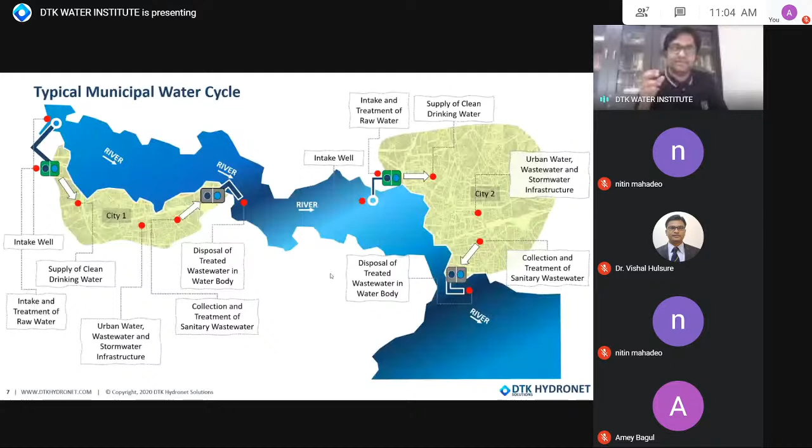Today we are going to see how a typical sewerage scheme looks like. Now, once we supply water, it's also the utility's responsibility to collect this consumed water in the form of wastewater. We collect this water and we treat this water, and we have to reuse it or dispose it back in the source.

So we have different combinations of hydraulic calculations which can be considered while analyzing and modeling a sanitary sewer network. For instance, in this particular case, we have pressurized hydraulics as well as open channel hydraulics. Right? So all this wastewater is collected by virtue of the potential energy that is available in the water, and that also means that we are collecting it under gravity.

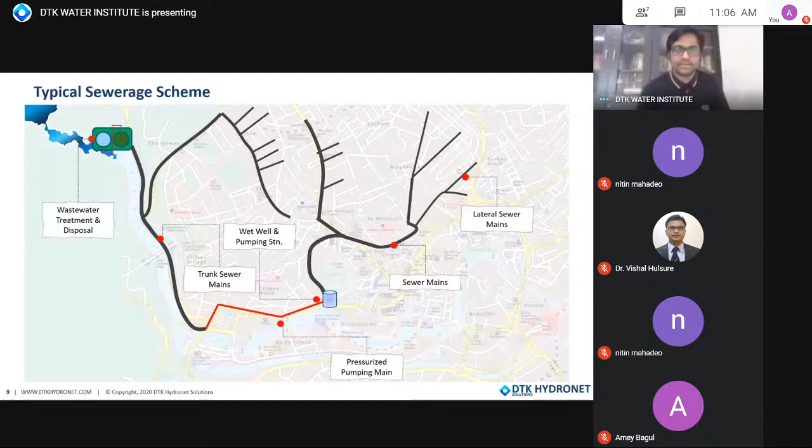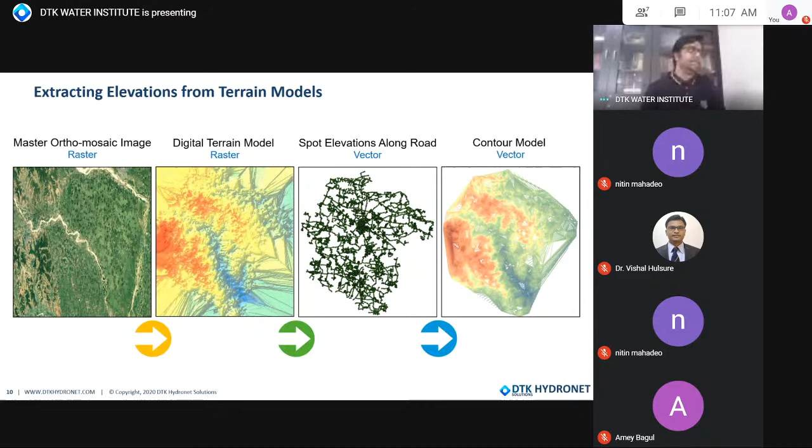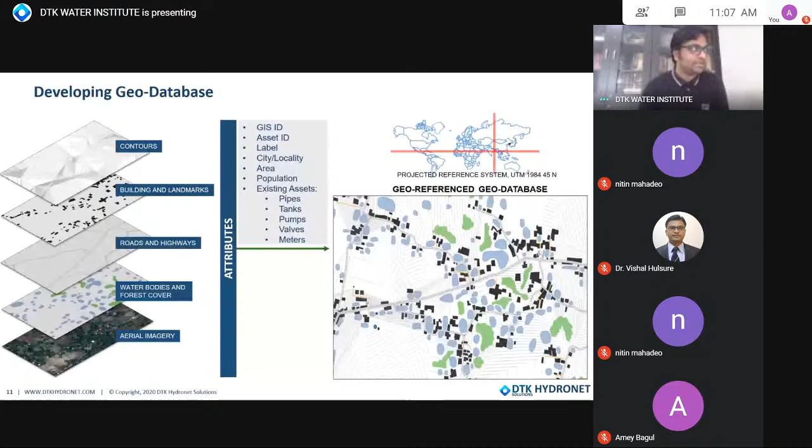And once all this data is developed, then comes the process of hydraulic modeling. Now, yesterday we saw what a hydraulic model is. Again, I would like to repeat. A hydraulic model is a mathematical representation of your real sewerage or water supply infrastructure. This representation consumes different types of equations, and calculations are modeled so that it gives you hydraulic information as a result.

Now, what kind of hydraulic information would a sanitary sewer network give us? It gives me the depth of water. For conduits, it gives me the velocity of wastewater flowing through those conduits, right? Is it maintaining the self-cleansing velocity criteria that the CPHEO mentions, or is it violating the maximum scouring velocity? Is it going beyond that?

So we can have an understanding of velocity, of discharges, and also of this d/D, that is the depth of water inside the conduit divided by the diameter of that conduit. So we can have these different properties as part of the results generated once the hydraulic model is computed. Also, for manholes, we can understand which manhole is contributing how much sanitary wastewater load on the system.

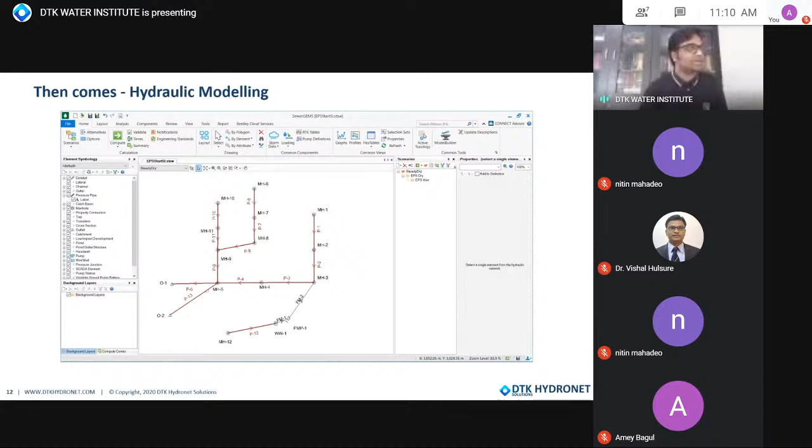With this data, we construct a hydraulic model, and we enter all the physical properties of the elements of the hydraulic model. For example, if I have an existing sanitary pump station in the network, what are the pump characteristic curves, right? If that is an existing pump, I'll have to gather all that data and enter the physical properties of the pump in the hydraulic model.

Then we start allocating the sanitary loads to every manhole. In India, most utilities calculate this using some kind of Excel, or you can also use GIS maps and polygons to understand the contributing population on every manhole, right? Once we understand the contributing population on every manhole, we understand what the sanitary load on those manholes would be. Then we compute or design the hydraulic model.

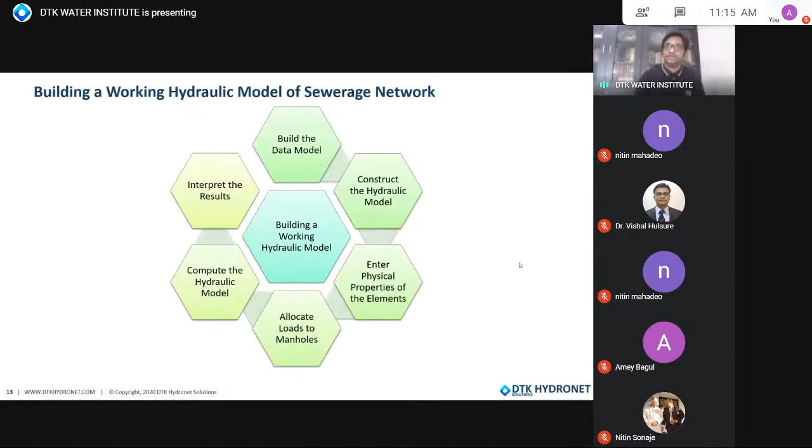It can also handle pressurized as well as gravity systems, like I showed in the first couple of slides, where you collect water under gravity up to a certain point in the network, and then you pump the water either directly to the STP or to some high elevation from where water would flow under gravity. And you can use SewerCAD to automate the design of pipelines and inlets. It will also help you understand what should be the manhole invert levels, the optimum invert levels of every manhole.

And whether it's possible for us to practically have those invert levels in the network, because it depends on many other factors. For example, it depends on the kind of substrata that we have, the type of rocks beneath the ground. So it depends on multiple factors, but it gives me an idea whether I should go for that particular invert level or some other invert level. So this primary design can be obtained with the use of SewerCAD.

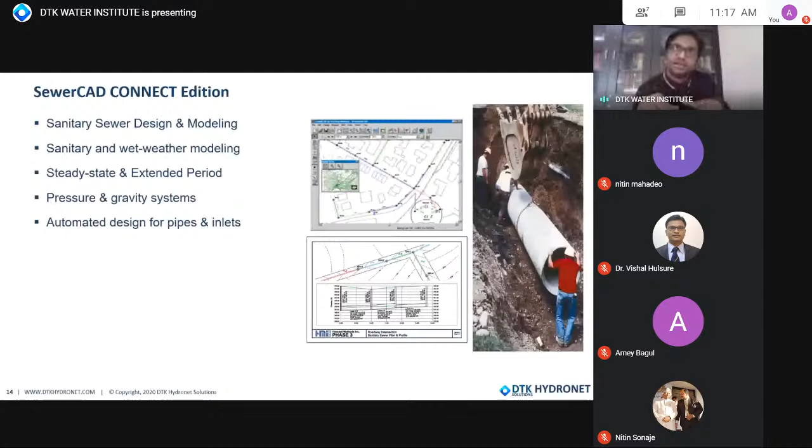The next software is StormCAD. StormCAD is a software for storm sewer modeling and design. When I say storm sewer, all the stormwater infrastructure that you have in the city, you can model, analyze, and design using this particular software. Now, mind you, sanitary sewer hydraulics is different from storm sewer hydraulics. The fundamental difference is that in a sanitary sewer, the loads are contributed by the human population.

However, for storm infrastructure, the water load on the system is being calculated by the rainfall events, right? And it also depends on what kind of return period you are dealing with. So this uses the popular equation, the rational formula, to analyze and understand the discharges through pipes, and it can be used as standalone, and it can also be integrated entirely with AutoCAD, and it offers quick model building tools. It is easy to use, layout, and so on and so forth.

However, this tool can also be used for automated design of storm sewer networks, right? So this is another tool that I want to introduce. The third tool is CivilStorm. Now, CivilStorm uses dynamic wave modeling, dynamic wave routing, and it offers fully dynamic stormwater analysis and optimization. Now, when I say dynamic wave routing, most of you might know this popular equation, St. Venant's equation. It uses St. Venant's equation for dynamic wave modeling.

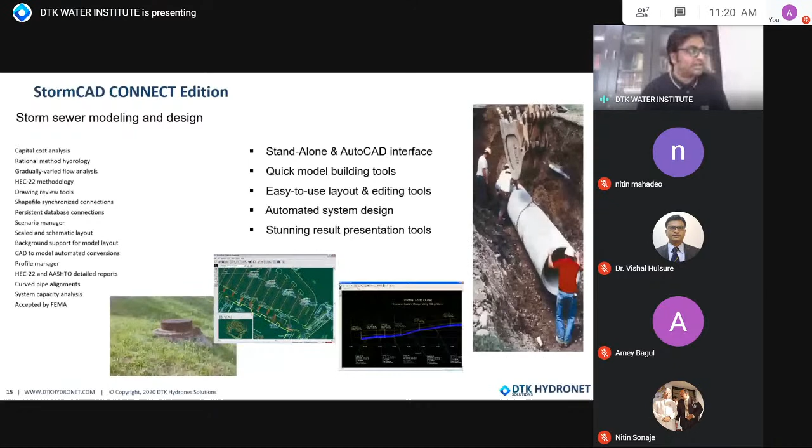And you have to understand, if it rains heavily in Parel, how is that affecting Worli, in another part of the network, because this goes across up to Worli. This is an example, right? So you can use CivilStorm to understand the dynamic behavior of rainfall and its impact on the stormwater infrastructure. Now, these are three different software using different equations, having different hydraulic mechanisms working behind them. When I combine all these three software, that is StormCAD, SewerCAD, and CivilStorm, and bundle them in one software, that software is called SewerGEMS.

Now, as I told you yesterday, GEMS stands for Geospatial Environmental Modeling Software. So this offers complete integration with the GIS application, which is ArcGIS. At the same time, it offers complete integration with AutoCAD and MicroStation. So CAD as well as GIS applications, right? So when I say that it offers complete integration with GIS, I intend to say that if I open ArcGIS, I can use all the features and functionalities of ArcGIS, and on top of it, I can integrate ArcGIS with SewerGEMS.

So with all the features and functionalities of ArcGIS, I can use all the features and functionalities of SewerGEMS, all these three software, right within ArcGIS. So everything will look like ArcGIS, but you'll have an add-on feature of SewerGEMS functionalities right within ArcGIS. The same is true for AutoCAD. SewerGEMS also completely integrates with AutoCAD, so all the features that you'd be looking at would be available right inside AutoCAD.

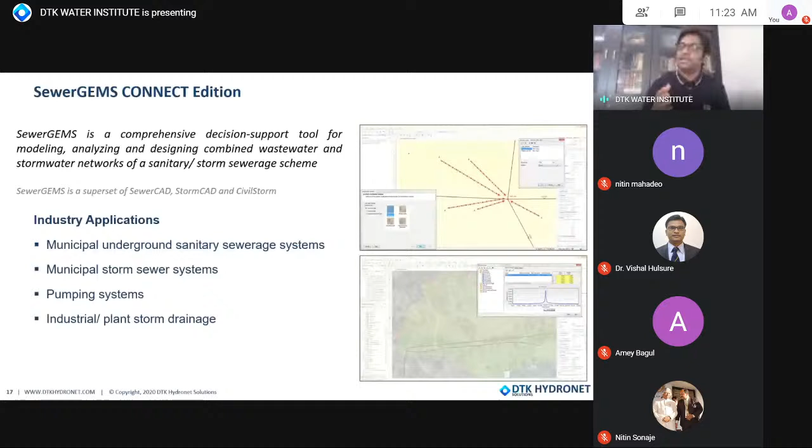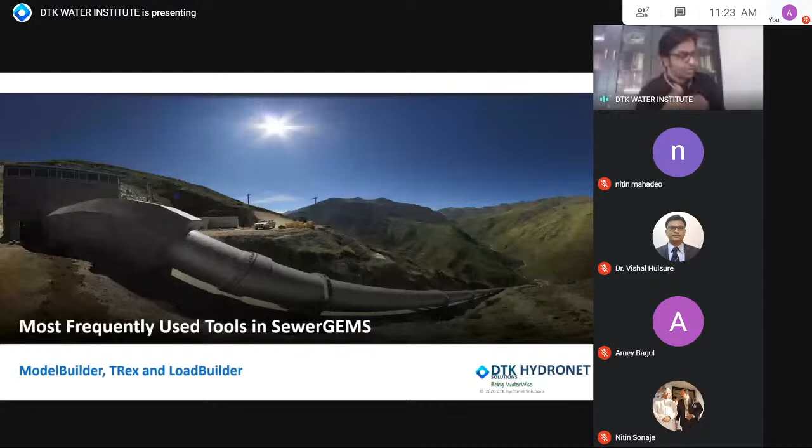So SewerGEMS is a comprehensive decision support tool for modeling, analyzing, and designing combined wastewater as well as stormwater networks of a sanitary or storm sewerage scheme. Now let us take a look at the most frequently used tools inside SewerGEMS. Again, like WaterGEMS, these are the top three tools that will help you save a huge amount of time. The names of the tools are ModelBuilder, TRex, and LoadBuilder.

Now this is the workflow for model building, model development. You need to have GIS data. If you don't have GIS data, you can use CAD data, Excel data. You can combine this database. So you need to have a database, and then you have to use ModelBuilder to generate a model with all the data which is available. You can use ModelBuilder to import Excel. You can use ModelBuilder to import CAD data. You can use the same tool for importing GIS data.

Once you develop or create a fundamental or basic hydraulic model of your sewerage network, then you use LoadBuilder to import sanitary load conditions and assign those loads to individual manholes. So this is where you can use LoadBuilder to automate this process, because as all of you know, we have to consider a manhole for inspection and maintenance purposes at every 30 meters of pipe length.

Now, if I consider this, I would end up having lakhs of manholes, literally thousands of manholes for a city like Pune, right? So it would be really tremendously difficult for a modeler or for an engineer to assign sanitary loads for each and every manhole. So this Load Builder will automate the entire process, and in no time it will assign and distribute sanitary load to all the manholes across the network. So this is the second tool that is going to save you a lot of time.

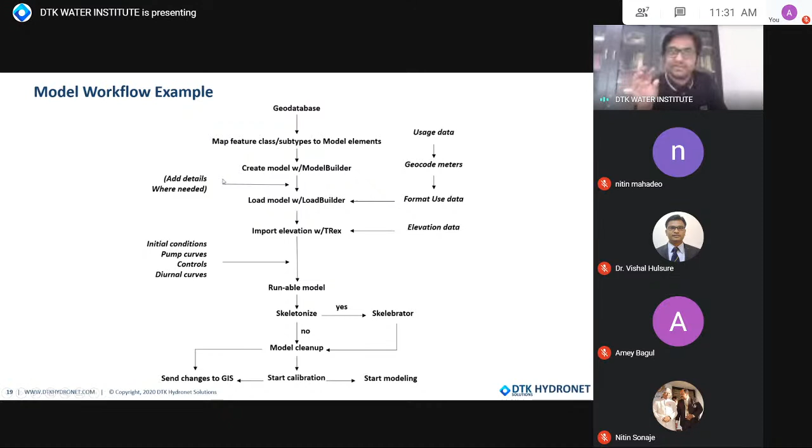So this is the model workflow. I have already explained what model builder is. So model builder will consume all the possible data sources. It can be a simple Excel file, or it can be a CAD file, and it will consume that to create a sanitary sewer hydraulic model.

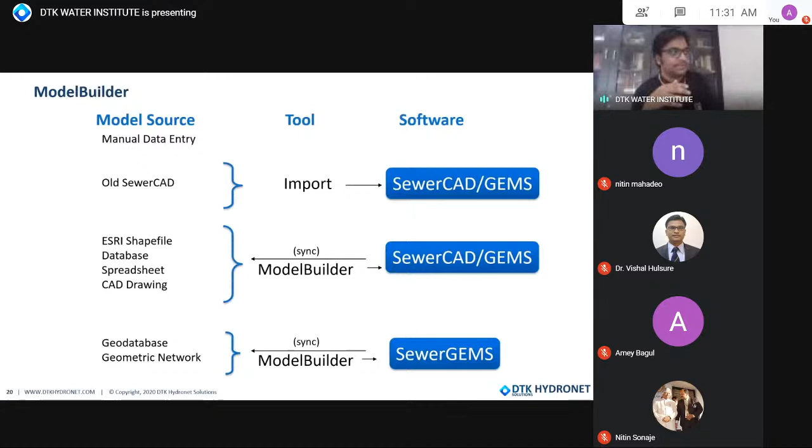Then comes TRex. As I explained, TRex stands for terrain extractor, right? And it extracts digital terrain information from your database and assigns it to your hydraulic model.

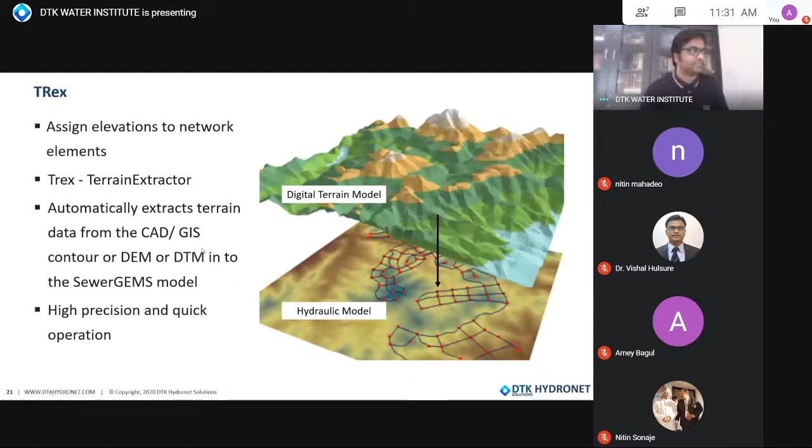Then comes the load assignment. Now, load assignment is really important because you have population parcel data, right? So for example, you have population wards, that is ward-wise population. For every ward, there would be census-based population, right? So we have to project this population for the next 25-30 years, and that projected population will be contributing some sanitary wastewater, and that wastewater should be collected through our infrastructure, and our infrastructure should be designed accordingly.

So how do I understand what would be the sanitary load being collected on every manhole? I cannot have a house to house survey done that, okay, you are connected to this manhole, you are connected to that manhole. So for this, we need to have a logic. Now the logic that I'm presenting here is load assignment based on population data.

So I have population-based ward boundaries. I project this population for the next 30 years, and then I calculate what is the population density of every ward. Right? Now with that information, I also need to understand what is the area that a manhole will be catering to, that a manhole will be responsible for collection of wastewater. So to understand that area, we can develop Thiessen polygons.

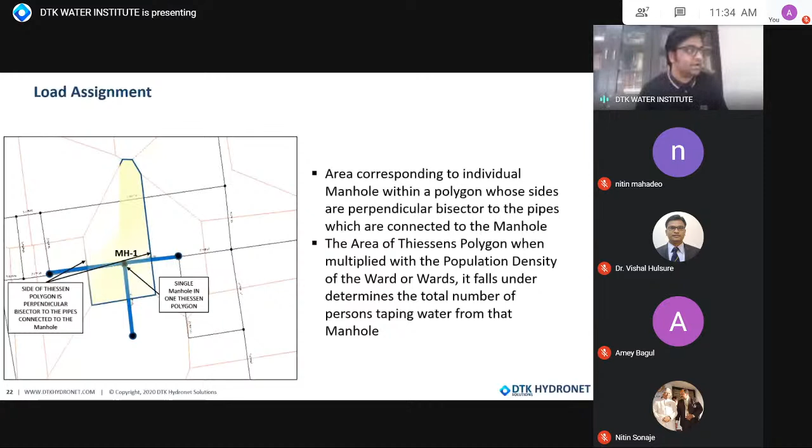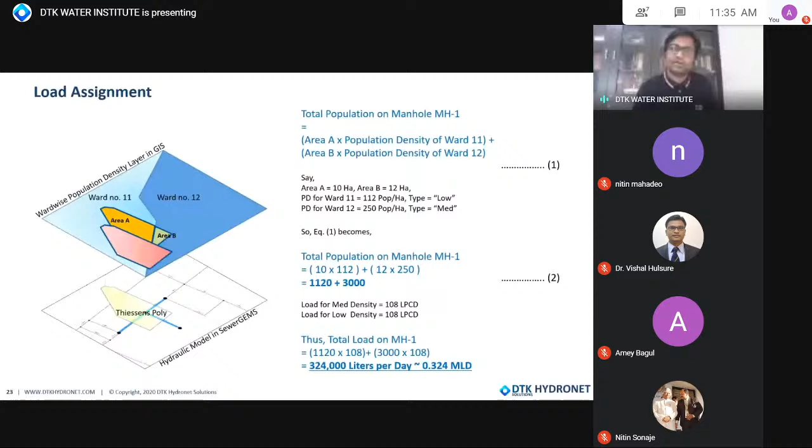And when I multiply that population with my standard load, which is 108 liters per capita per day. Where does this 108 come from? It comes from an assumption that whatever water I'm supplying to the consumer, 80% will be flushed inside the sanitary wastewater network. So 135 is the average that we supply, and 80% of 135 becomes 108. That is what we are going to collect. All right. So this is how we calculate loads on every manhole.

However, if you have thousands of manholes, would you be doing the same thing manually for every manhole? No. So therefore, you have different tools inside. So different tools like Thiessen polygon and load builder, which when combined can save you a lot of time.

All right. So you can see on the screen, this is why we need load builder, and load builder can consume different types of data. For example, like I explained, it can consume the population data from ward boundaries, and it can allocate that population data to individual manholes with the logic that I explained previously.

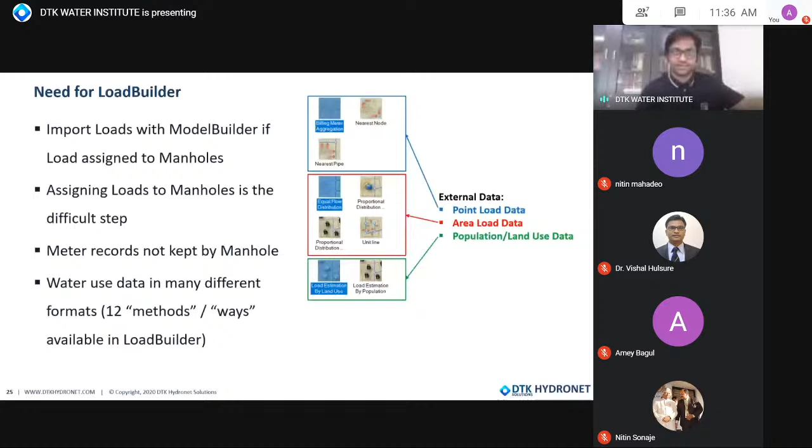Then I am going to come to a 1-minute demonstration of SewerGEMS. So let me go to SewerGEMS.

So this is the standard graphical user interface of the standalone version of SewerGEMS. This is how it looks. And if you observe, it resembles very precisely other Microsoft applications like Microsoft Office, for instance. So you'll find all these options right within Microsoft Word as well. So the graphical user interface is really sorted. It is quite easy for a user to navigate through the different operations and functions that the software offers.

So here you can see a sanitary wastewater network. Now the connectivity logic is that a link will be connected to one node on either side of it. So node-link-node connectivity logic will be used. As you can see, the nodes here are different manholes and the links are different conduits, pipes. And there are two outfalls over here. The wastewater being collected from this particular region will be collected in these two outfalls. So you may have different outfalls.

If you see here, this pipe 13 has got a curved arrow. What it means is this is a diversion link. So if the discharge in pipe 5 increases or goes beyond a certain value, all the additional discharge will be diverted into P13 and to another outfall. An outfall essentially is a collection chamber. It can be a sewerage treatment plant or it can be a wet well. All right. So you can model different complex networks like this.

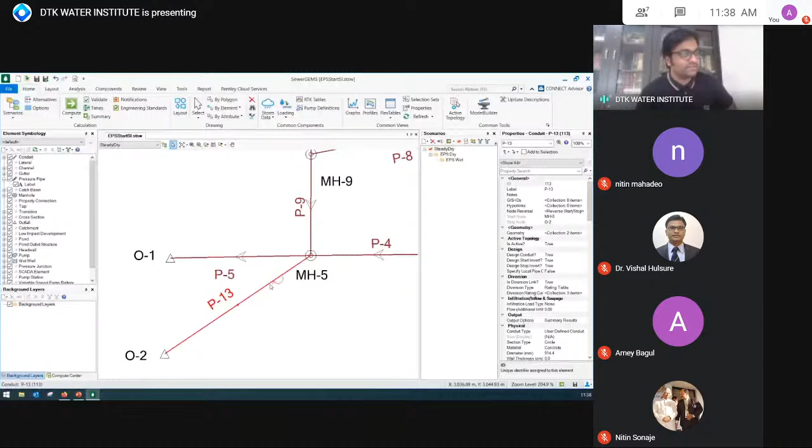You can also combine it with pressurized hydraulics. Like in this case, manhole 12 is contributing sanitary load under gravity through pipe P12, which is being collected at wet well 1, this WW1. So this is a tank, a well, where all the wastewater will be collected from manhole 12 under gravity. But because of topographical differences, I want to lift this wastewater and discharge it to manhole number 3.

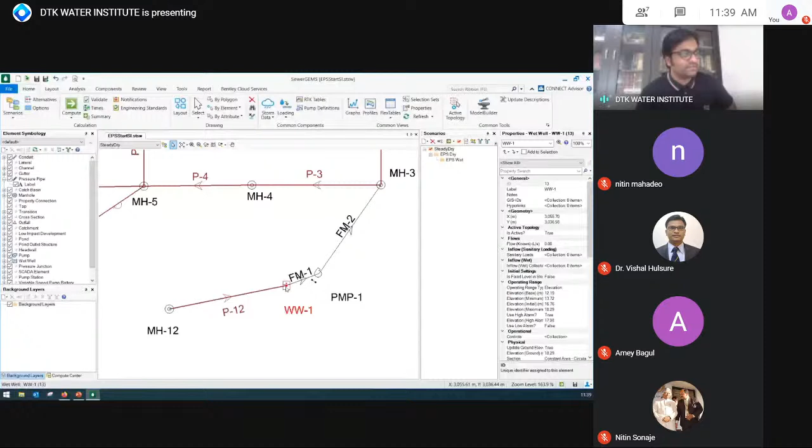So I can combine gravity flow hydraulics with pressure hydraulics. As you can see, I can have pumps and pipes running full, pressurized pipes, and I can discharge water to manhole 3. From manhole 3, the water will again be collected under gravity to outfall 1. So you can go ahead and compute this network and generate results out of it. I have already shown what kind of results can be generated, right?

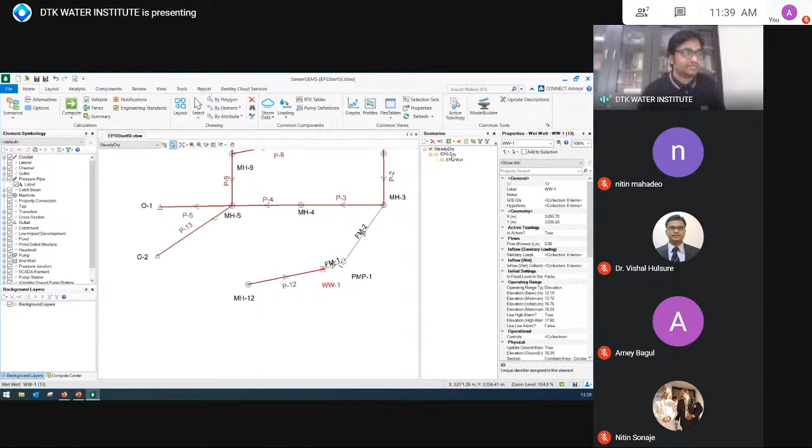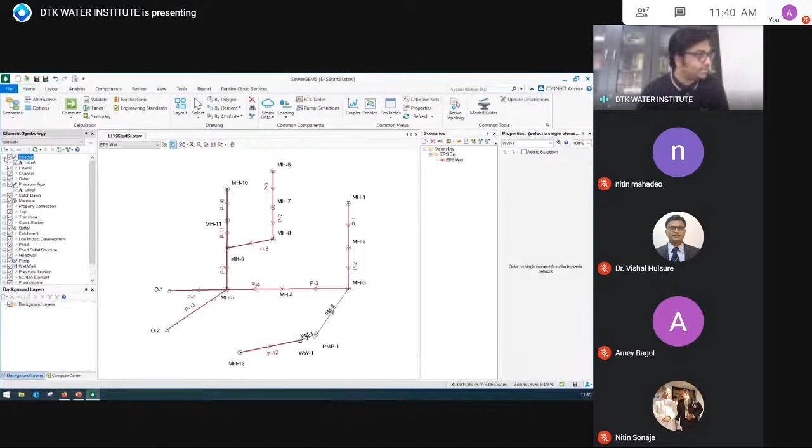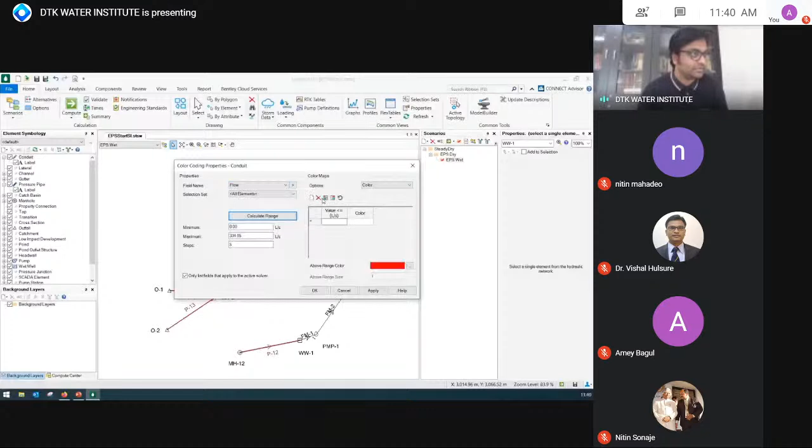Now, if the discharge is fluctuating over a period of time, I can analyze the temporal behavior of the network, how the pipes are filling, how the d/D ratio is fluctuating throughout 24 hours of the day. So I can do EPS analysis and have a time-based visualization of the network, as you can see over here. Every 20 minutes, it shows you how the network is behaving, which manholes are contributing more water, whether any manholes are overflowing, and if so, for how many hours.

So that you can take preventive measures, or be ready for that emergency well ahead in time. You can train your operators and maintainers by simulating a worst case situation on a hydraulic model, and make them ready for the emergency situation well ahead in time. So you can use such hydraulic models for modeling such situations. This is one of the applications or use cases for sanitary wastewater.

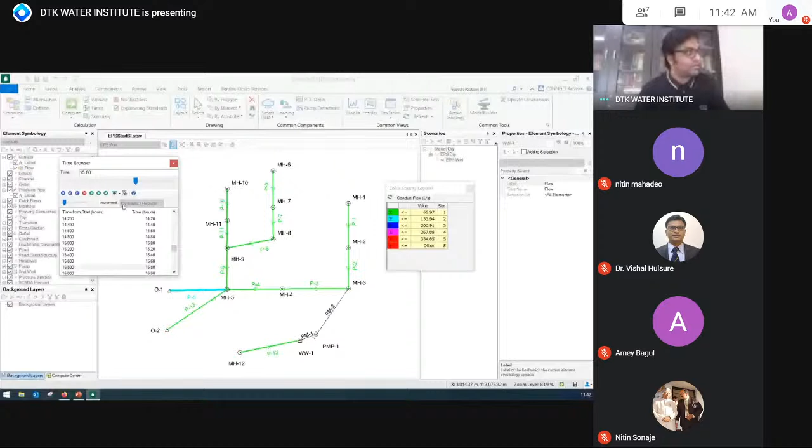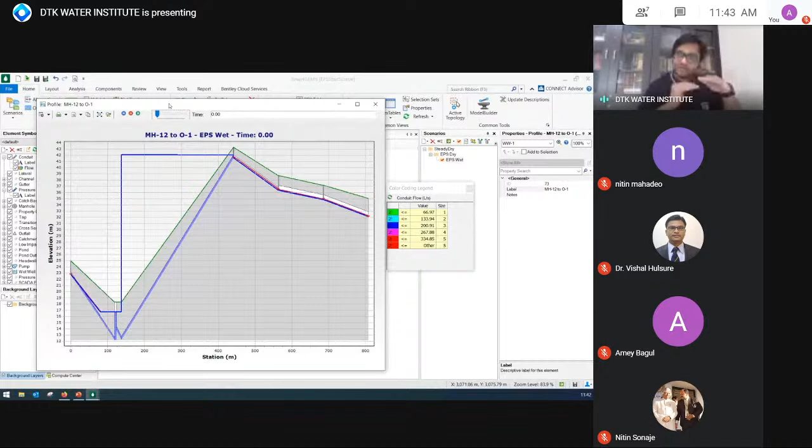So here we have a profile, right, of manhole 12 till outfall, and then you can animate this profile and understand when the pump should start, when the pump should stop, right? So if I go ahead and hit this play button, it will help me see how the water levels in the wet well, that is the collection chamber, are fluctuating over a period of time, and when the pumps are starting, when the pumps are tripping, right?

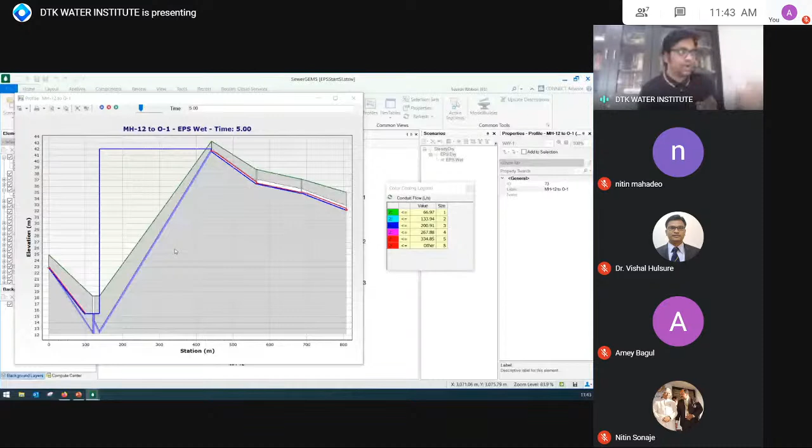So you can do different kinds of control. You can subject your hydraulic model to different kinds of controls, and you can evaluate different options of controlling your system, right? So this is how SewerGEMS looks like. So this is where I would stop this demonstration. I have explained it in all the possible details that is possible for this session, and then I'll come back to my presentation.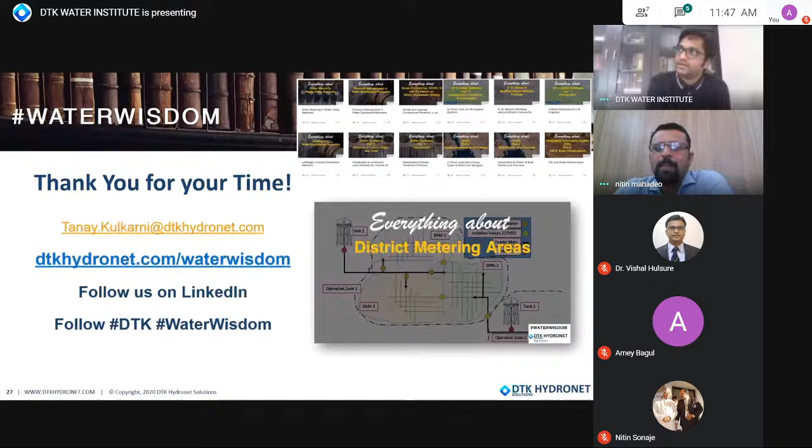Yes. How could we manage slope? Suppose my pipe diameter is 450. What will be the slope? I'm not sure whether I got that question. He's asking, how could we manage slope? Suppose pipe diameter is 450, what will be the slope? So if the pipe diameter is 450, what should be the slope? It also depends on what kind of discharge we are talking about in that 450 diameter pipe.

It also depends on what is the incoming invert elevation, right? And it also depends upon what is the end elevation of the outfall. So there are so many aspects to it. I cannot give you an answer right away with such limited information. But yes, the software will give you an understanding or a hint. It's our responsibility that we should have our inputs after the design is given by the software. So it depends on many aspects. I don't think it is possible for me to give you a vague answer for this question.